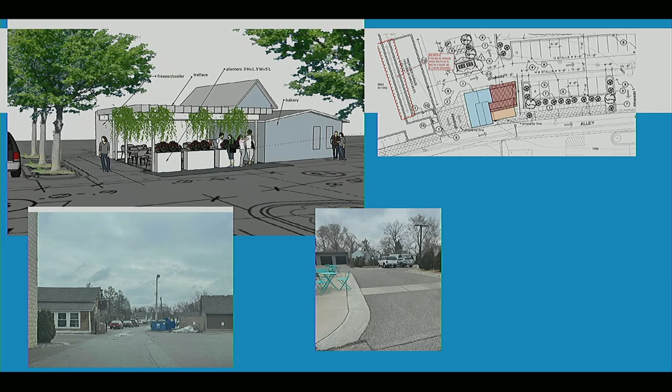So just some graphics again here that we saw at the last meeting, just showing the cooler, and then a couple pictures from the alleyway itself. Here's some better images here that show aerial, showing the site. Again, those trash receptacles are right over to the north there. The first one in the upper left is looking from south to north, and then the picture on the right-hand side from the audience's perspective is looking towards the west along the site.

So the action that is requested tonight is a recommendation on the resolution PC 2025-010. That would amend the developer's agreement, and then that recommendation tonight would be forwarded to the council meeting next Monday. So the applicants are in attendance this evening and can respond to any questions that the commission has on the project.

Great, thanks Nate. Real quick question before we bring the applicants up though - the more I thought about it after the meeting, looking at stuff, is it possible to even close that whole portion of that alleyway off and have an entrance and an exit on both sides? I don't know if that's - you know what I mean, because I don't think our goal is to limit you guys in your business, but that alley is really, really tight there. Just thinking, is it possible to do that on both sides and just cut the middle completely off, or is that something that would have to go to the council?

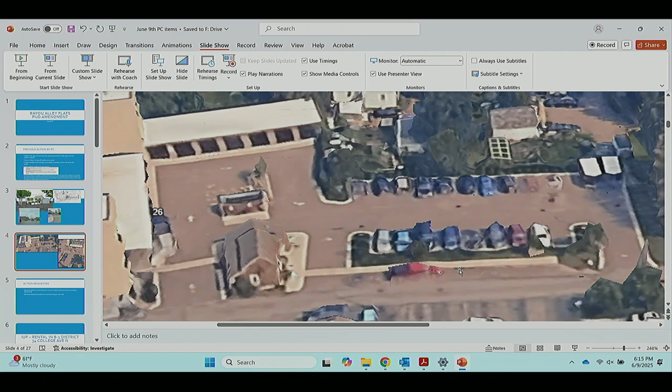Yeah, because that's on their lot, correct. Is it something where we could stripe that too? I mean, obviously loading vehicles could still pull in and load, but just no parking because it's a loading zone, call it. Yeah, you could tackle it a variety of different ways.

You can just do straight no parking from whatever time to whatever time along this stretch, or you can do the first couple spaces right here, no parking. It's really what the commission feels is best and what would help the situation. I wouldn't be opposed to striping it if you're already going to stripe the first one. Is that going to mess with deliveries though?

No, because you could still have the delivery people pull up into it, for the loading purposes - if that's the only thing that's going to pull there, it actually would be better, because then you don't have cars parked there during delivery time. Obviously we have to enforce it, and hopefully you guys can get it out on social media, but if you're going to stripe it, you might as well do the no parking / loading zone right there.

And you just do the whole thing up to it, I guess, or like your point, Nate, even if it's the first 2 or 3 spots, because then you could still keep a couple spots there. I would say, just because the overall site is dense in terms of limited parking, maybe from a staff perspective, have some half of it open. Right, half of it - because then you could probably still fit 2 cars there on the end.

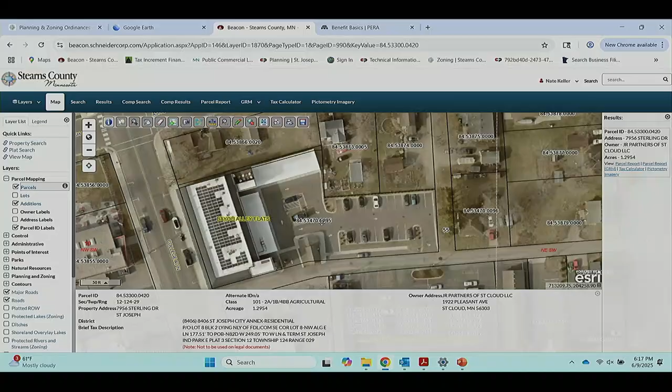Is that all one property, or is there another property line that goes north-south there? So this is all one property? It is, right. Yep, this entire site is part of the overall planned unit development.

And the parking stalls are adequate to meet the needs? Correct, yep, because they have the garage parking and such. That was part of the overall PUD that went through and was approved back in 2014.

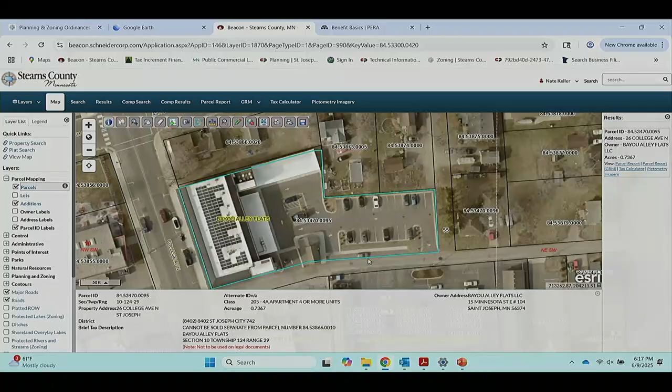Do they have extra spaces? I do not believe so. They just utilize the lot alongside the other building that Petters owns. And these ones right here, I do not believe were part of the quantity of spaces that were approved as part of this original PUD. And since 2014, there's only been one other amendment, and that was in 2017.

That was when there are 3 units on the lower floor, call it the northwest corner over here, that were changed from commercial to residential units. The original intent of the PUD was to have the whole lower level be commercial. So that was the only change that ensued since the original adoption.

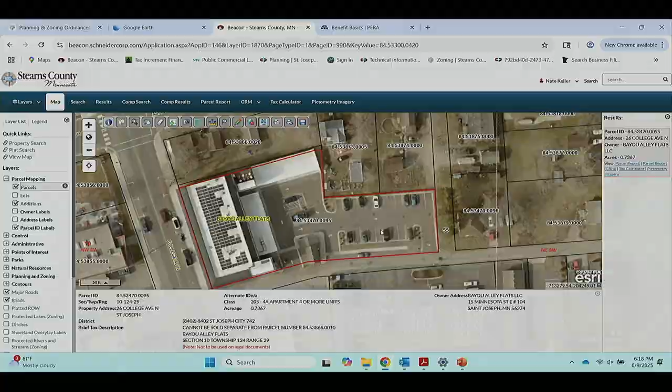That didn't bring up anything to add parking with those 3 developments, correct? So they had ample parking per our ordinances? I do not believe so, yeah, because the site was existing as it was. Yep, there was no other modification.

The only reason I ask is because, well, can you eliminate some of those spots so there's more area to move? But again, just trying to think outside the box, right?

Keith and Andy, just a quick question. Your concerns for safety for the people in the patio area, is it from traffic from the alley, or is it from traffic going around the horseshoe and through the parking lot? I'm gonna say probably yes, both, right? It's a pretty congested area in there.

I understand the alley can get really congested, but I didn't know how congested the horseshoe gets when people want to go, because that's just for residents primarily. Right, but now I think it's a one-way, so we're gonna funnel cars in through that first. If anyone needs to get there, they're gonna have to drive by twice. Right, but it's already a one-way going into the horseshoe, into their parking areas.

They're already doing that. And I know if you close off that middle one, because there's been times too where it's like, I don't know if I'm supposed to take a left in the first or left in the second. So you do have people sometimes that go the opposite way. So again, eliminating it will force them to do that, right?

I guess your biggest concern is getting that big truck in there if needed, right? Fire safety, yeah, safety. And that's why I said, on the back of it, if needed, heaven forbid there's a fire, we don't ever want that, but...

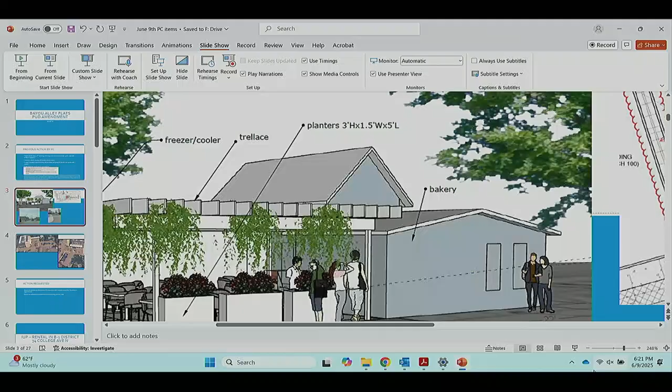To refresh my memory, the cooler goes just to the east of the actual shop, right? Yeah, it would extend towards those ancillary spots, and that's kind of why we want to close it off, because that's where it's going to extend into. Yep, we would like to maximize the space, and that's the only space that will really work to access it from inside of the bakery.

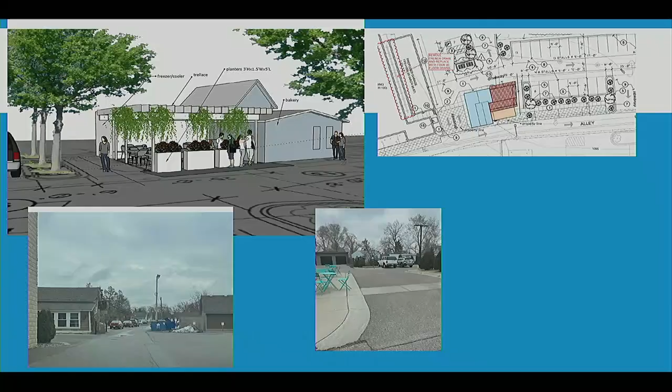Yeah, kind of, if you go back to that, remember that arrow pointed out in the middle, there's a gas meter there. Those things would probably have to be relocated to give us access out to the trash.

I wouldn't even entertain putting a cooler there because it'd interrupt the retail space, and it'd also be in the way of the garbage trucks. So for me, the way that I envision my space is that's kind of where it would need to go, whether it's going that way or alongside the sidewalk in the back. Either way, it's get a patio or forfeit my patio, but either way, I just need a cooler, so however it works.

Okay, thank you. Any other questions, concerns?

Okay, at this time I'm going to make a motion to approve Resolution PC 2025, but with stipulations to stripe those first couple parking spots of the loading zone and add no parking there. Do I have a second? I'll second it. So I've got a motion and a second.

Any more discussion? I'm still pretty concerned about what you guys brought up about the fire truck. I'm not as concerned about the patio and the cooler as much as the fact that you can't get a truck in there right now. That bothers me, that we don't have the ability to get safety equipment in there.

Can I ask one question? I know we were parked there because we were waiting, so that maroon van was ours. Had that maroon van not been there, would you have been able to take a wider turn and not have to do that little T back-up to get into that circle? I don't know. The first turn, yes, the first left would have been easier because it was pretty tight there. But actually getting around the other one, I don't think we would have made it either way.

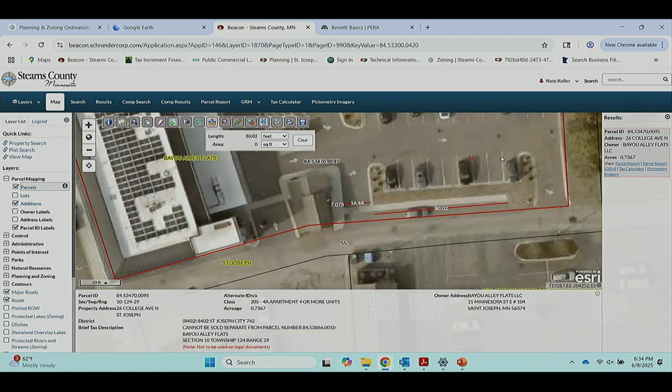Yes, so do it with the striping, and then the additional signage or whatever, we have to come back later. That can only be used for loading and unloading. Hey, maybe you could park there for certain hours of the day?

Does anyone get a truck after 5? No, not even. But you still don't want people parking there. No, and we, as restaurant owners like Bello Cucina, La Playa, we can tell our drivers that they should veer off into the stripe zone to load and unload, to keep the alleyway open. We are able to do that. Will they listen all the time? Maybe not, but the more we push our reps to tell the drivers to do it, they will. And most of them, we try to do a key drop, so at least 2 of them come before 6 AM. Oh, that's good too.

I still say just stripe it, it's more than just no liquor store parking, period. So the motion is to approve Resolution PC 2025 with the additional striping where those 4 spots are.

All in favor, please signify by aye. Aye. All opposed? Whoa, you got more? No, you just left off, when we talked about the ability to come back 6 months later about any additional signage that we need. I just want to make sure that gets addressed.

So do you want that in the motion as well? Okay, well, let's retry this, again. I'd say let's do a new motion. I'm gonna make a new motion to approve Resolution PC 2025-10 with the stipulations to stripe those 4 spots and come back in, what do you want, 3 months or 6 months? 6 months to talk about adding more signage there through the city, for safety and security.

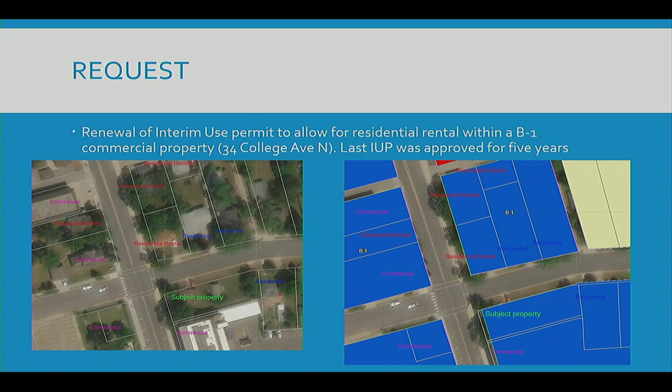So the action for this evening is to open and close that public hearing, and then the second step would be a recommendation on the resolution PC 2025-012, which would approve the finding of fact and issue a renewal for the interim use permit.

One item we do request for discussion is the appropriate duration. We've talked about duration in the past with other interim use permits. We have in the language right now a 5-year max drafted. We did include graphics from the applicant, who does intend to convert the property to a commercial use in the future, so they're already thinking about those things. With that, I'd be happy to answer questions. Otherwise, we'd be looking for that public hearing and then that action on the resolution.

Any comments from the commission? All right, if not, I will go ahead and open the public hearing. Does anybody wish to come up and speak? Don't all jump at once. All right, I will go ahead and close the public hearing.

So now we are looking for a motion to approve resolution 2025-12, adopting a finding of fact. Do I have a motion? I'll make a motion. I have a motion, I'll second. And a second. Any more discussion? All in favor? And just real quick, Chair.

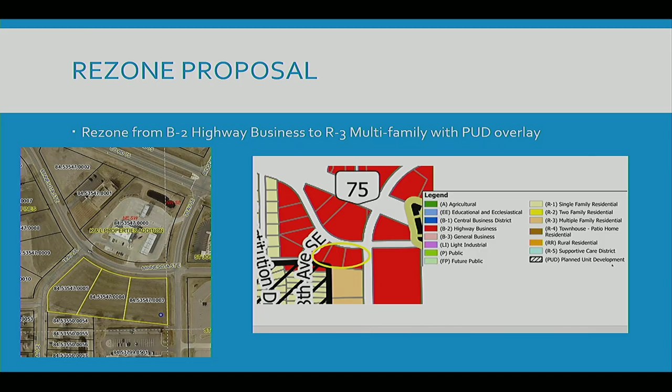This is just the zoning map showing the overall city here, and then I included a table. This is also in your packets, just again alluding to how the zoning is for the surrounding area, and then how the future guidance is for that surrounding area. So the future guidance matches the current zoning around the adjacent parcels.

The purpose for the rezone is the applicant wishing to construct a 42-unit multifamily apartment building with a PUD overlay district. Some background within the city: the number of lots that we have that are B2 highway commercial, we have about half a dozen or so that are shovel-ready right now, and those are mostly in proximity of the current area, just to the west of the subject parcels.

We have 3 other apartment lots available throughout the entire city, with one of those being shovel-ready—they would just have to get a permit to construct—and the other 2 need to be final platted. So we don't have a lot of other apartment areas that are ripe for zoning now or guided for multifamily in the future. The areas that we do have, there's not existing infrastructure that can service those areas.

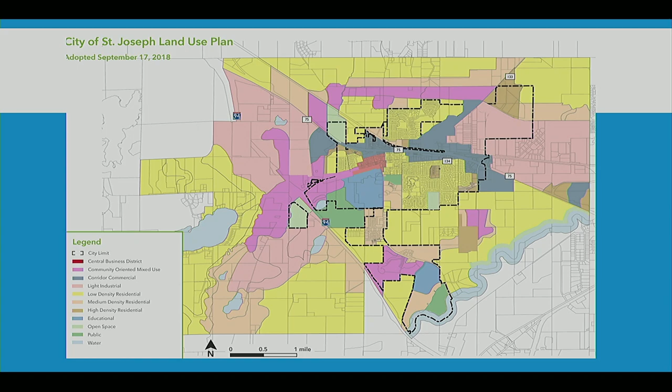So this is a future land use map. Some of these colors might be a little hard to differentiate on the screen, but high density residential is a darker brown on this. You can kind of see on 75 west of town there's some pockets, and as we go on County Road 133 out towards Sartell, there's a little pocket over there. Those are all future high density areas. Now those could change if someone were to request that change. And all those areas you can see are not connected and not next to a lot of the existing infrastructure.

R3 zoning—of course multifamily apartments are allowed. I wanted to highlight some other things allowed within this district. For permitted uses, we include things like churches, libraries, townhouses, in-home daycares, residential facilities for group homes. And there's some other conditional uses as well, including public buildings, manufactured home parks, and uses that the Planning Commission deems similar to these listed uses.

Within the current zoning of B2, we allow any use that's permitted in our downtown district. We also allow things like automobile repair, convenience stores, funeral homes, grocery stores, hotel motels, places of worship, retail stores. And for conditional uses, things like pet boarding, new or used dealerships, and lumber yards. I wanted to point those out so the commission fully understands what is allowed right now and what could be allowed with the rezone as well.

So again, the rezone is being sought. The PUD specifically is being sought due to the proposed density of the 42 units. During discussions with the applicant, we determined that R3 zoning alone wouldn't be enough because there are density limits for R3 zoning—it depends on the exact number of 1 bedroom, 2 bedroom, 3 bedroom units and what that makeup is on how many would be allowed. But a safe estimate is around 36 to 38 units for R3, so they're proposing slightly more, and with a PUD they can have increased density.

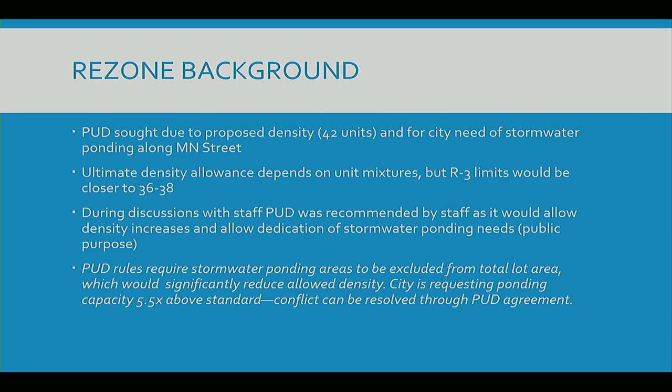One conflict we did cover is that within a PUD, stormwater ponding areas are supposed to be subtracted from the total lot area, which would have impacted the density allowed. However, in this instance, the city is requesting that additional stormwater area within the site, so that could be resolved through a PUD agreement if these were to move forward and be approved.

I just want to touch on the future land use amendment. This is required if the rezone is approved, and it's just to update the future land use map in that bluish color—again, that's the highway district. Those are the properties guided for highway commercial.

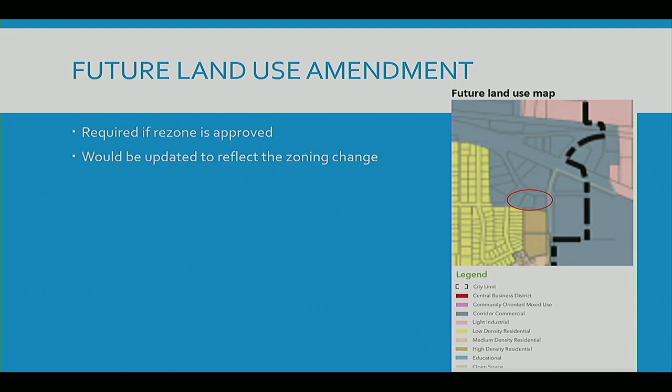So requested actions for the rezone are: one, open and close that public hearing; two, provide a recommendation on resolution PC 2025-013, which is the finding of fact for the rezone; and three, a recommendation on resolution PC 2025-014, which establishes the rezone. These would be forwarded to the council. I also include those actions for the future land use amendment. After these two, we would then request action on the PUD, which I can get into greater detail after. Sounds good—questions?

Does this have any implications to the Beltway, or are we good on that front? The Beltway? No. There's still pieces that the St. Cloud Area Planning Organization has to sift through as part of that Beltway planning, but no, because the Beltway as it is now is essentially 20th Avenue. Sweet, thank you.

Anything else? All right, if I don't have anything else, I'm going to go ahead and open the public hearing for the rezoning proposal. I have a question.

Step up to the front and say your name and where you live. Mary Filzen, 210 18th Avenue Southeast, St. Joe. My question is, how will building apartment buildings affect my property value?

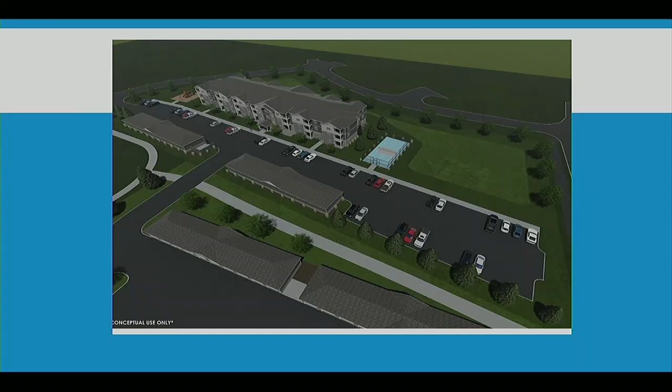So going back to the map that had been up - you guys are wanting to put a road up against where that current walkway is, or does it take the place of it? You mean the one that connects the two parking lots? Yes, the one that goes over the walkway. That's part of their conceptual plans, to include that connection, mostly so the site has a second access in and out. Instead of directly connecting to 20th on the west, having them come down to the south and use the existing access was what was designed.

So will there be any walkway back there or will it only be road? Because I'm home most weekends and evenings and it's constantly used except when it's raining. Are you asking if there would be a sidewalk connection from the side of the garage and parking lot to that trail?

Yeah, that's part of the discussion. That's part of the conceptual plans and the PUD proposal - sidewalk connections in and out of the site, and sidewalk connections around the site. So the commission could ask or recommend that a connection be made from that parking lot directly to those pathways.

Will that pathway stay in at all alongside my house, or will that become a straight road? No. This graphic shows that pathway in that concrete color, where it kind of curves - that's all existing, so that would all stay.

I think part of the applicant's reasoning - and the applicant is in attendance this evening too - behind some of the placement of those garages, specifically the ones to the west of that access point going south, is to aid as a buffer for the single family homes on that side and to the southwest.

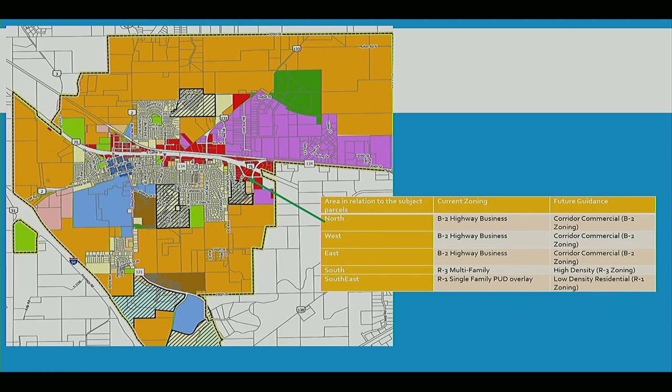This would butt up against R3 to the south. You recall the existing apartment complex to the south. And then the roadway, Minnesota Street, and 18th Avenue on the west would then be, if this were to be approved, the boundary of the residential to commercial areas.

So this right here, I know this is a little hard to see, but this was in the packet. So this would turn to this right here, and then this all would stay as the commercial.

All right, any other discussion? I have a motion and a second. All in favor for the finding of fact, say aye. Aye. And opposed? All right, that passes 3-1.

All right, Nate, the next one would be the motion of the resolution. Sorry, a lot of slides here. There you go. All right, so this is the recommendation of the resolution PC 2025-14. This is establishing the rezone, correct? Okay, so do I have a motion for the recommendation of establishing the rezone?

I'll make a motion for PC 2025-14, establishing the rezone. Do I have a second? I'll second it. Okay, we have a second. Any discussion?

What's this one saying now? So this is just establishing the rezone itself. So what was the last one? The last one was finding of fact, changing it from business to R3.

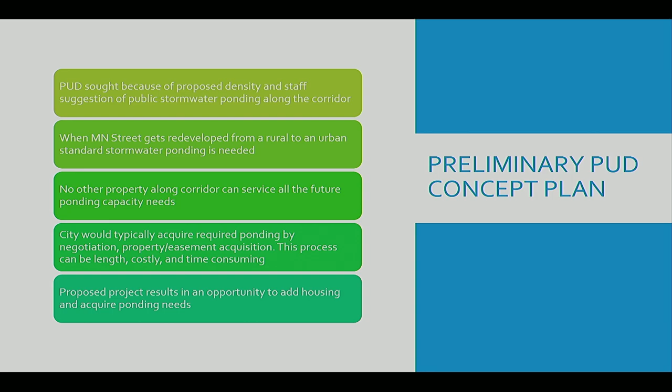What triggers that change from rural to urban? So that would be part of enhancing that street to meet city standards. Right now it's old rural standards, township with ditches. When it changes to an urban standard, you have the stormwater collection system, stormwater pipes that get put in, and trails and sidewalks.

I think more what I'm curious about is when does that line in the sand come up? Is that just when Randy says it's time for a new bituminous overlay or something? Yep, and that would be part of our capital improvement plan for the city.

Right now there is no timeline for this section of road to transition. It'd be up to the council's direction to decide when that transition occurs. However, prior to that, part of this project provided an opportunity to capture the ponding needs. Right now the city does not have any other land along this corridor to capture those needs, so the city would have to negotiate with individual property owners for acquisition of land or easements to accommodate the capacity of ponding needed.

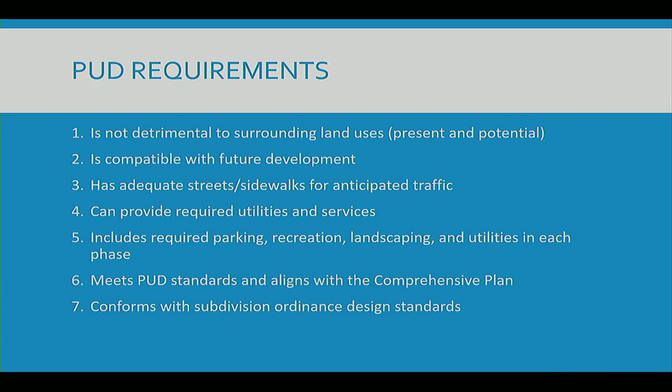Also within the PUD requirements, some findings that are required are that the proposed plan is not detrimental to surrounding land uses, is compatible with future development, has adequate streets and sidewalks, provides required utilities, required parking, aligns with our comprehensive plan, and then conforms with subdivision standards.

Again, we talk about stormwater ponding here, and Planning Commission shall provide input on the overall concept plan, the compatibility, the public benefit, and the zoning elements that we had talked about.

So some site specifics that we want to get direction from the commission on are sidewalk connections within the site. Some of that was brought up earlier as part of the rezone public hearing, but we would like to see at minimum there's a sidewalk on the south side of the apartment complex that connects to the trail out on 20th Avenue. We'd like to see that sidewalk also extend out to 18th and that intersection near their access point. We've talked a little bit about future sidewalk along Minnesota Street, so the northern part of the site. Again, when that Minnesota Street develops from a rural to an urban roadway, we feel that capturing that future sidewalk as part of a future improvement within the site is appropriate. Kwik Trip, again, across the way to the north, they don't have a sidewalk, but they're required to put one in once that roadway transitions to an urban standard.

We talked a little bit about providing a connection along 18th Avenue. We recognize that there's a lot of bikers and pedestrians that not only would be created as part of this project, but also that exist in the surrounding area. So providing that connection along 18th Avenue to get up to Minnesota Street, and then that future sidewalk on Minnesota to get out to 20th Avenue would be appropriate. But we're looking for feedback from the commission on that. And then also we talked about that connection to the south and some of the reasoning on why it's reflected in these plans, but getting some input from the commission on that as well.

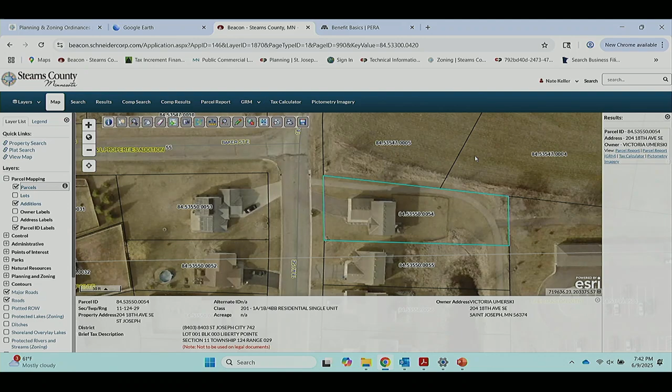It's a crazy map, all right. I'm just pulling this up to try and see, because I'm not 100% sure if all of those trees or some of those trees are within what area, but they'd probably be in the property they're talking about, within the property that they want to build. By the time they get done doing the drainage on that, I won't promise you they're gonna stay. It's gonna be a combination of new trees and the garages.

Whoever wants to speak, can you come up to the mic here? Just for the online folk - actually, right now the public hearing is closed. Well, she wants some, she can't hear them. Yep, I know, but we just gotta kind of control where we're at, so it's us to discuss kind of where we want and where we're at.

So more than likely they might have to come down, but they would replant, and it looks like they would replant down over here too. And that's kind of what I would like to see, would be a lot of vegetation, trees to block the view of the backside of those garages all the way along the path back here, so you've got a nice vegetative - if that's a word - blocking. And again, down the path they've already got that slated for everything around it.

Andy, I like your idea of the speed bumps. Go across, unless we can access 20th Street and eliminate that crossing across to that other parking lot, which you could add that into the PUD to approve. I would prefer, Kelly's point, where she wants it off of 20th and not 18th, so you completely cut it off there, and if it gets too busy, we can always put a roundabout in there, right? Yeah, I mean, I can't speak for Randy and the traffic folks, I can only relay that this is part of why you see what you see on here.

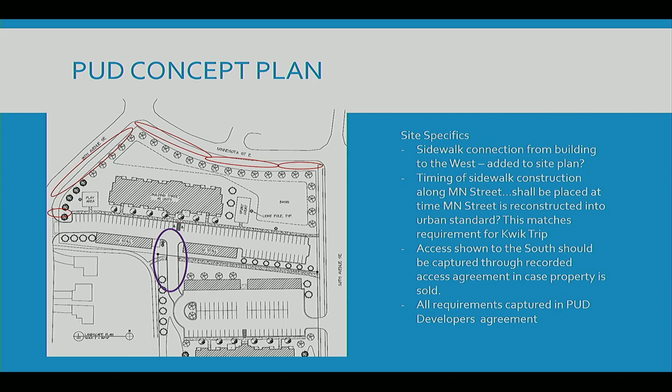So one thing we called out too was the direct connection from the internal sidewalk going to the west, to the 18th intersection. And then what I'm hearing now is also to have that sidewalk connection travel along 18th to Minnesota Street at the time of development and construction.

And then, obviously, if you want to make the entrance on 20th, then I would say you connect that sidewalk. If you cut off the entrance on 18th, you connect it all the way down.

So you connect the sidewalk where 18th is, and if we decide to move forward with the PUD amendment of closing off the access to 18th and switching it to 20th, now you have the sidewalk where the entrance was continue all the way to the walking path. Am I making sense? Just have it continue from Minnesota down to the walking path, is what I'm saying.

Have the sidewalk on Minnesota Street? No, have the west side of the property go from Minnesota down 18th all the way to the walking path, if they decide to cut this off. Got it.

Lighting - somebody had mentioned something about vandalism and different things like that might be going on. That's probably pretty dark back there. If you take a look at the parking lot, the buildings, the other two apartment buildings, this new apartment building, and you've got a parking lot, and then you've got those garages, there's nothing back there.

It's probably gonna be pretty dark at night, especially if I request vegetation to go in. What about lighting to give it - I don't know if it would blind people at night, or if lighting would be appropriate to give it a little more security type lights. Some landscaping lighting just to give it more visibility. That's something else that I wanted to raise.